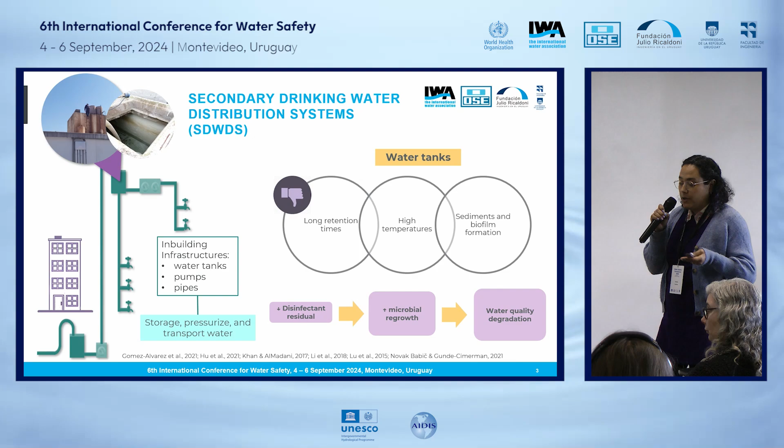Y todo esto hace que se produzca un crecimiento microbiano, un recrecimiento microbiano en estos sistemas. Y todo esto lleva a una degradación de la calidad del agua, principalmente una degradación microbiológica. Es ahí a donde nosotros queremos hacer foco y queríamos empezar a investigar en nuestro país para desarrollar mejores herramientas y nuevas herramientas de monitoreo y gestión de estos sistemas.

Nos hicimos preguntas como si el agua en estos sistemas, la calidad microbiológica, realmente sea afectada y luego de pasar por estos sistemas siga siendo apta para consumo. Y luego otras preguntas como qué microorganismos están en esos sistemas, en los biofilms, en los sedimentos, en el agua, cómo se intercambian entre las diferentes fases. Y por último, si estos sistemas podrían ser reservorio de patógenos oportunistas, como nuevos indicadores de alguna forma.

Para abordar esto, nos planteamos trabajar con sistemas, básicamente tanques elevados de cemento de diferentes edificios: hospitalarios, residenciales y universitarios. Los muestreos los hacíamos, ya que necesitamos acceder al tanque para tomar las muestras de las paredes y del sedimento, inmediatamente antes de las limpiezas. En Uruguay se recomienda limpiar anualmente los tanques en general, y los hospitales cada 6 meses. Entonces, antes de la limpieza, entramos a tomar muestras de agua, biofilm y sedimento.

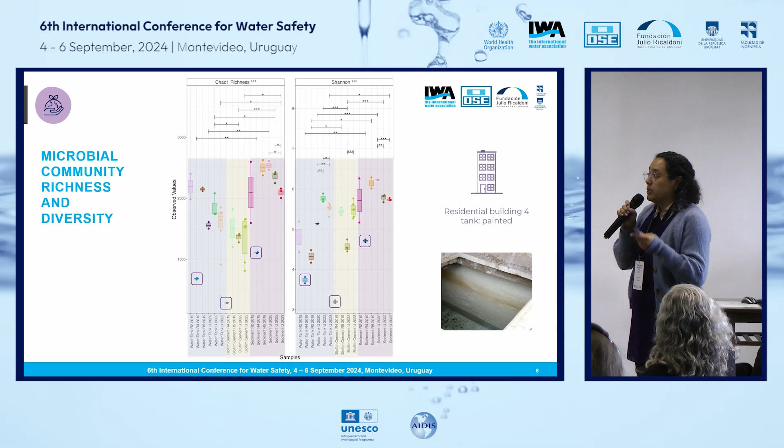Y cuando fuimos a mirar estos gráficos, también vimos que había unas muestras que tenían una riqueza y una diversidad bastante menor que el resto, y nos dimos cuenta de que era el edificio residencial 4. Ese edificio estaba pintado, mientras que nosotros trabajamos en general con tanques de cemento no pintados. Este en específico estaba pintado, y por eso tiene una riqueza y diversidad microbiana menor que el resto en todas sus muestras: agua, biofilm y sedimento.

Agregándole los hospitales, que se limpian cada 6 meses, vimos que en biofilm y en sedimento también teníamos riquezas y diversidades menores que en la media del resto de las muestras de los edificios residenciales y universitarios.

Perdón, pero está trancado.

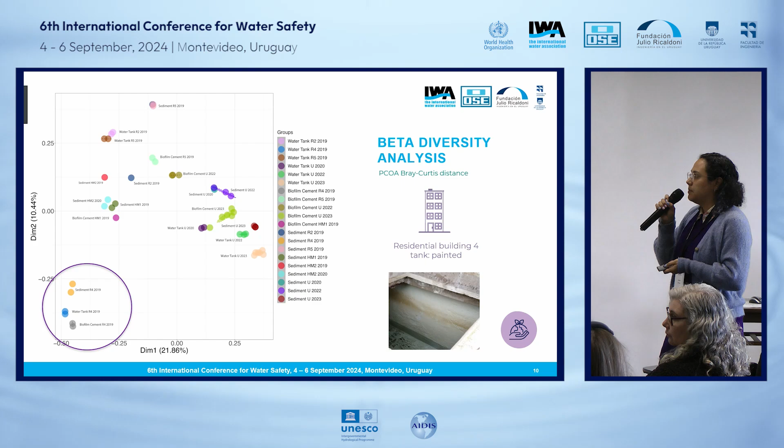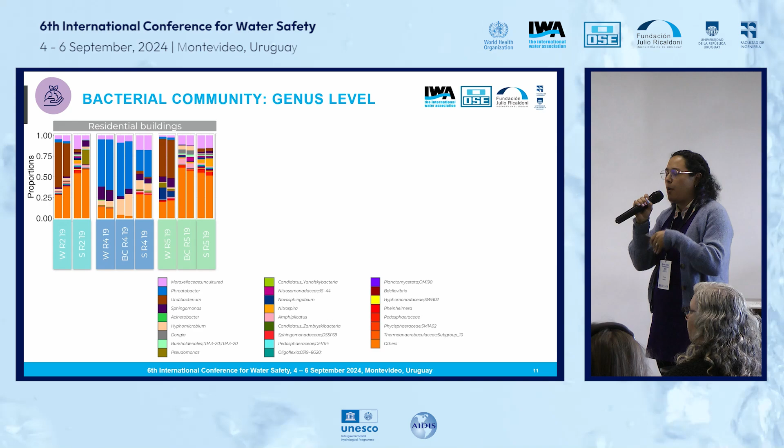Cuando vamos a ver los perfiles de los microorganismos, es decir, los más representados y abundantes en estas comunidades, generamos estos gráficos de barras que nos indican qué microorganismos son los más abundantes, en este caso los 25 más abundantes, y en qué proporción.

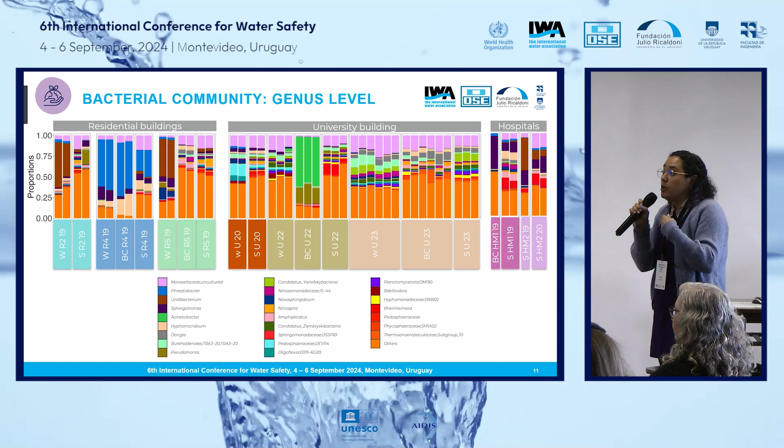Cuando vamos a mirar esto, vemos que son los mismos microorganismos para todos los tipos de edificios los más abundantes, pero la proporción cambia.

Y lo que vemos además... perdón, pero esto se mueve.

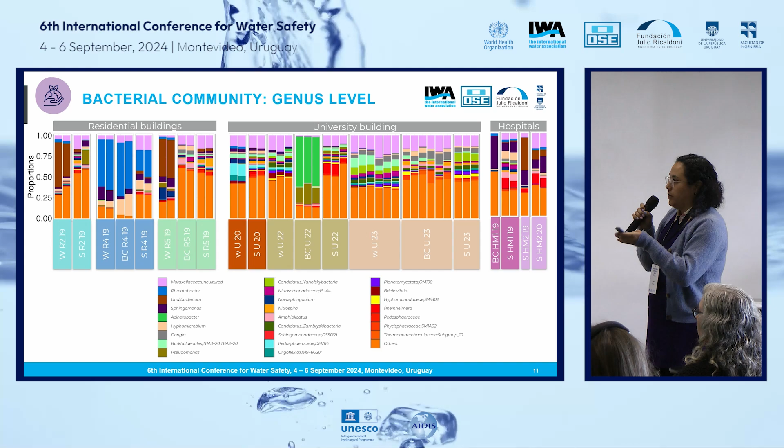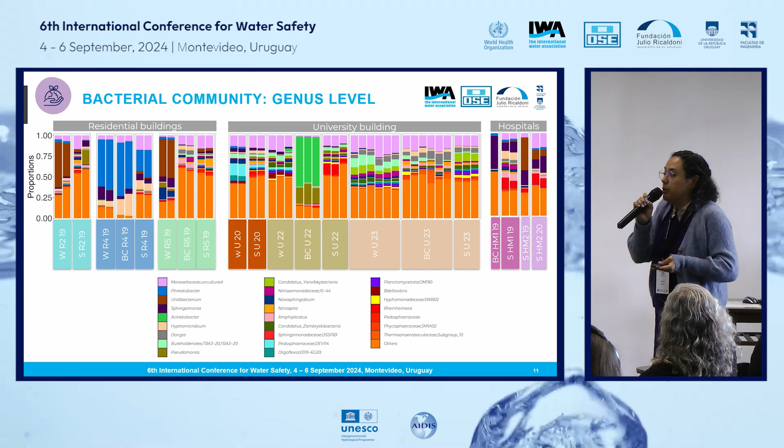Lo que vemos además es que los microbiomas, en este caso las comunidades bacterianas, son muy similares entre agua, biofilm y sedimento, pero van a depender del tanque, van a ser tanque dependiente, no son iguales en todos los tanques. Si bien tienen los mismos microorganismos, el perfil de esa comunidad es un poco diferente.

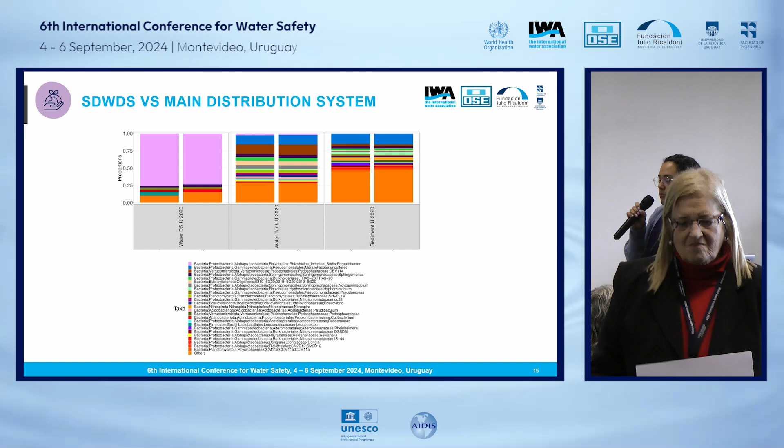Como final nos hicimos una pregunta: ya miramos un poco lo que son las comunidades bacterianas y fúngicas, y en todos los tanques más o menos el agua, el biofilm y el sedimento, la comunidad bacteriana es muy similar. ¿Qué pasa cuando la comparo con el agua de red?

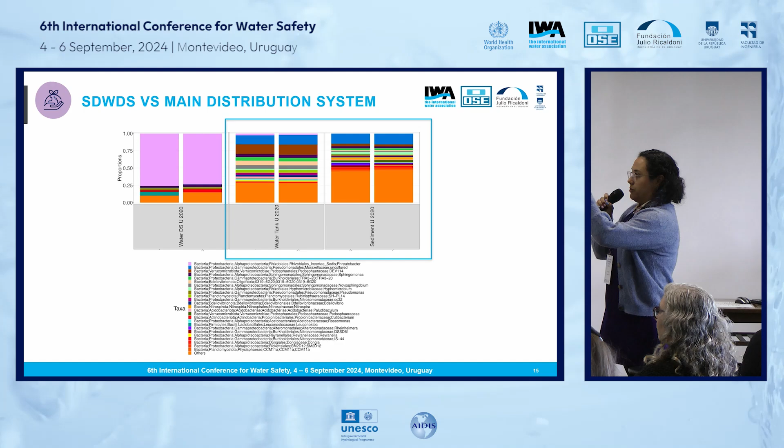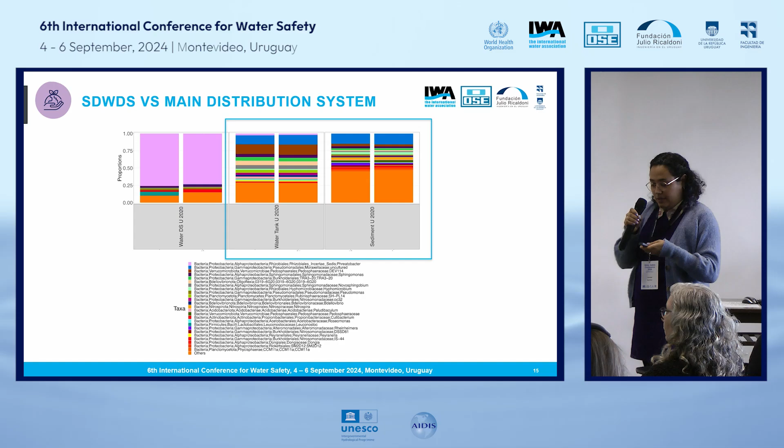A la izquierda, lo más rosadito es el agua de red, y lo que recuadré es agua en el medio, agua de tanque, y más hacia la punta el sedimento de ese mismo tanque. Vemos que la comunidad bacteriana del agua de tanque se parece mucho más al sedimento, un poco más sucio si queremos decirlo así vulgarmente, que al agua de entrada. Por lo tanto, estos sistemas están afectando realmente la microbiología del agua.

Como conclusiones, en cuanto a turbidez y pH, dos de los parámetros físico-químicos que medimos, solo el 20% no cumplió al final en el agua de los tanques analizados. En cuanto al cloro libre, confirmamos que está muy por debajo en los tanques, es decir que el desinfectante residual que se utiliza para controlar los microorganismos deja de estar, y por lo tanto no se puede controlar de esa forma.

En cuanto a la microbiología por cultivo de rutina, determinamos que más del 90% de los casos el agua antes de la limpieza no estaba apta para consumo. Eso nos despierta una pregunta: ¿cuándo deja de estar apta para consumo?

En cuanto al microbioma, vimos que las comunidades bacterianas del agua, biofilm y sedimentos son igual de ricas, muy similares entre sí. El agua tiende a parecerse a su biofilm y al sedimento del tanque, pero son menos diversas. En cuanto a las comunidades fúngicas, no teníamos resultados significativos que fueran diferentes.

En cuanto al tanque pintado, realmente la comunidad de ese tanque era diferente, y además, algo que no dije: en ese tanque no obtuvimos incumplimientos en el agua al momento de la limpieza, al año. El tanque podría ser reservorio de patógenos oportunistas, degradando la calidad del agua.

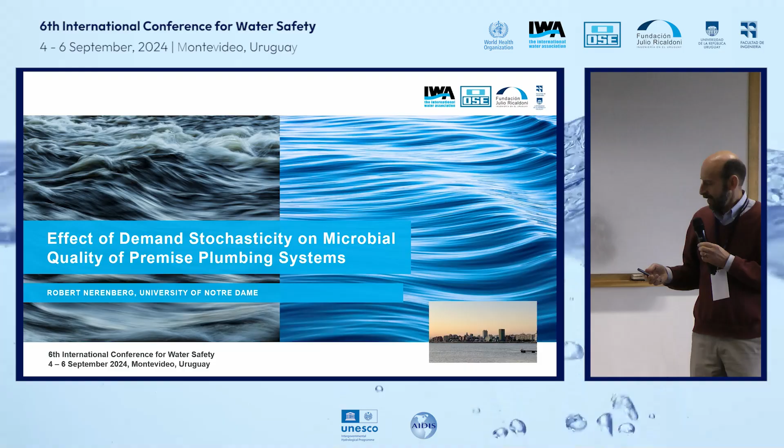Great. Well, thank you for the introduction. Before starting, I'd like to acknowledge the people that worked on this, especially Emily Clements, a doctoral student. What I'm presenting today covers 3 chapters of her dissertation, and also some colleagues who assisted on this research.

As we all know, we treat water at the treatment plant, and then we send it out into the distribution system, and the water quality can decline. It can decline because we have decay of the disinfectant, increase in temperatures which also affects the disinfectants, leaching of metals or other compounds from the pipes, and formation of biofilms. So all these things can degrade, and the more time the water resides in the pipes, the more likely the quality will decay.

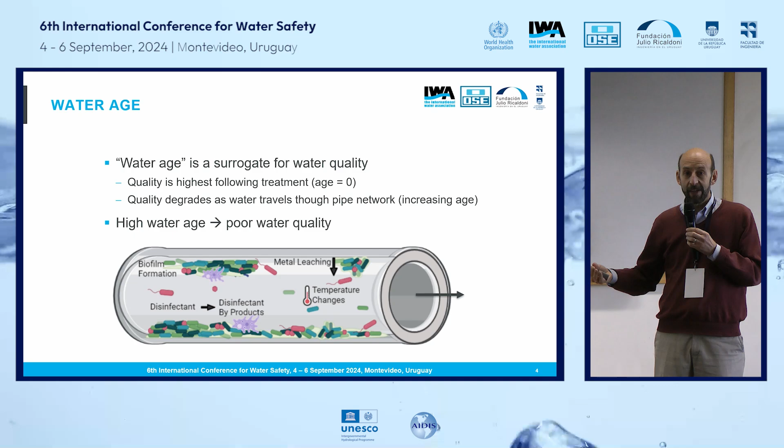So often we can use the water age as an indicator of the quality of the water, where if the age is very high, probably the quality is poor.

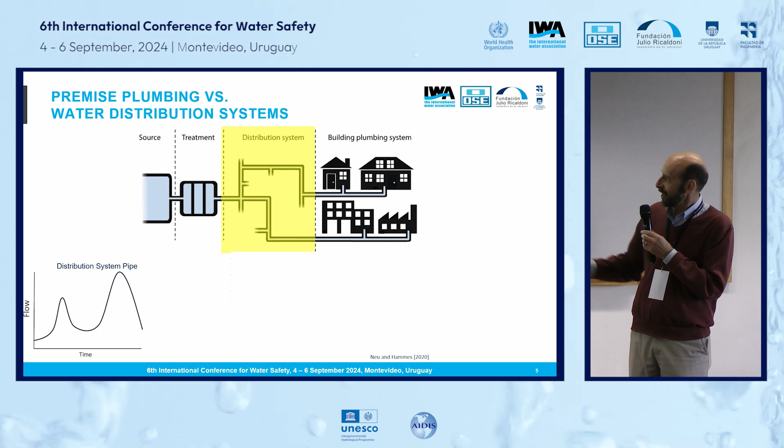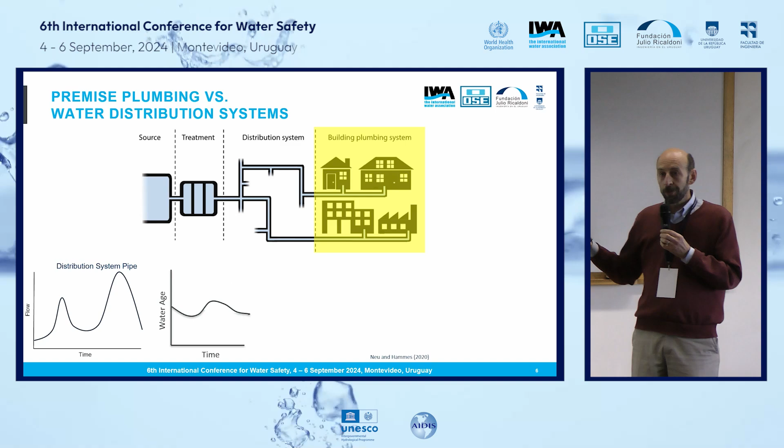As Soledad said, though, in the homes where the water is supplied, once the water enters the home, it's kind of your problem, it's your water, and if you don't use the water, it can be in the pipes for a very long time.

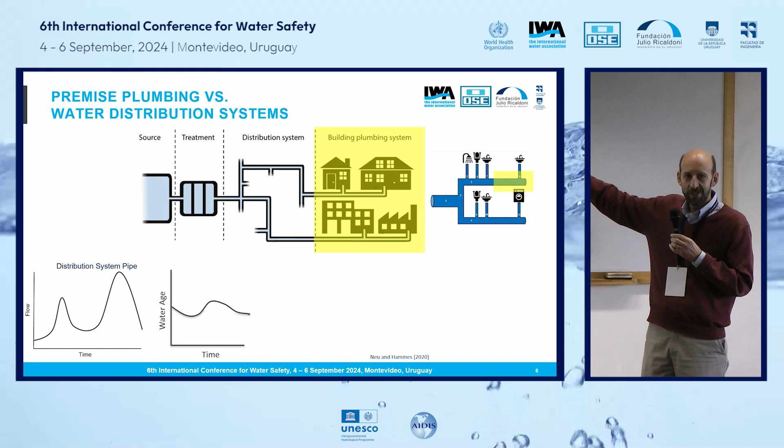So imagine here's the plumbing in your home, and in this pipe, if you don't turn on the tap at the sink, the water just stays there until you turn it on. This might look like the demand or flows of water over the day, where we have zero flow for long times. This is what the water age might look like in your pipe. So when it's not being used, the age increases until you open the tap, and then it comes down.

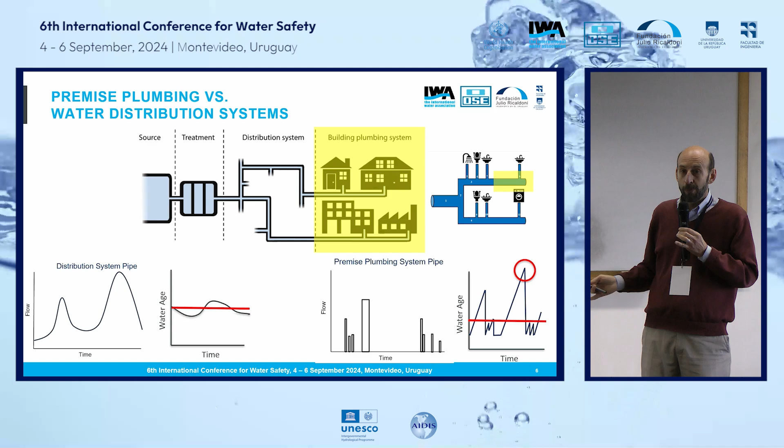So I would pose that in the drinking water distribution system with the big pipes serving many people, there's always some flow, so the water age might increase or decrease, but not that much. But in the home, it changes a lot. And if we look at the average for the distribution system, maybe it's okay. But if we look at the average for the premise plumbing system, maybe we're missing some important events that reflect poor quality.

So what we did in this study was try to characterize the effects of this variability in water demands. We did 3 studies, and I'll quickly go over each of these.

In one, we tried to characterize based on the stochastic water demands, because the water use is a stochastic process. Who knows? Maybe we take a shower one day and we go away for the weekend, and the shower doesn't get used for 2 or 3 days. It's a random process. So considering the stochastic water demands within a home, we wanted to characterize the extreme water ages.

In the second study, the effect of using automatic purging devices. So if we have a means to automatically use water on a periodic basis, maybe that can prevent long ages.

And finally, instead of directly looking at water age, we looked at the chlorine residual. Again, this is a modeling study, all 3 are actually modeling studies. But we looked at the chlorine instead of the age, because chlorine maybe is a better indicator for microbial quality.

So the purpose of this study was just to provide tools, because in the end, each home is different, each water demand is different, but maybe with tools we can see what are the impacts of having high-efficiency water devices that use little water. Is that going to impact the water ages a lot? Or maybe if we have 2 people instead of 4 people living in the home, how will that affect the age? Actually, all 3 studies were published in the last year.

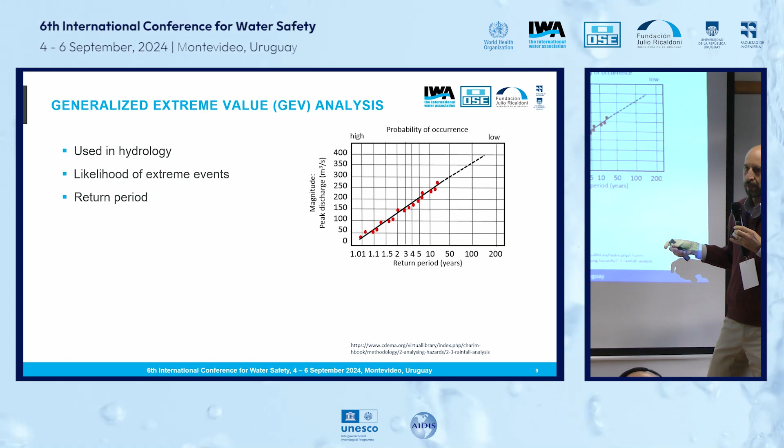So within 1 year, it's likely to have a small flood. But if we consider 100 years, what's the maximum amount of water that might come in 100 years? Well, every 100 years, we might get a really big flood. So you can see that for 100 years, there's a much higher flow. This is for hydrology. So we used a similar approach for the drinking water.

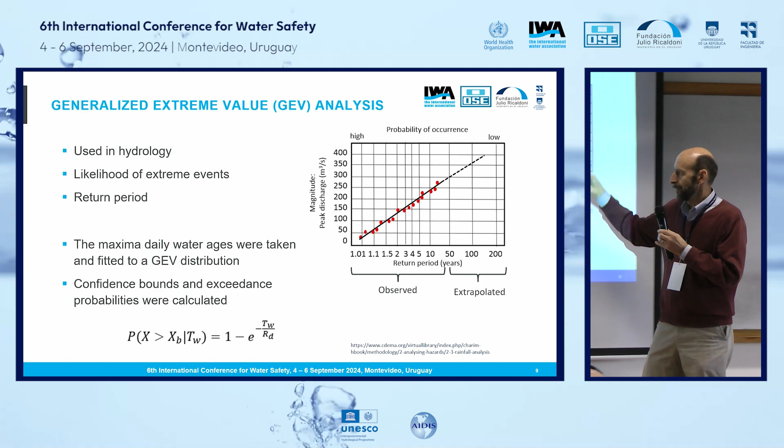Again, these are observed values, and then we extrapolate for 200 years because we don't have that much information. So basically, with this generalized extreme value analysis, we take the maximum values, we fit them to a distribution, and then we develop confidence bounds and exceedance probabilities. I'll show you in a second.

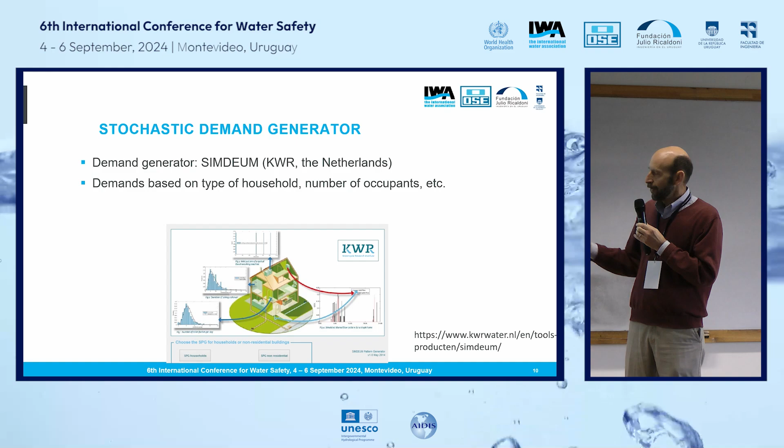In this study, we used a hydraulic model, EPANet, and we fed demands into that model based on a very nice tool developed by some researchers in the Netherlands. The research institute's called KWR, and the program's called SimDeum. It's basically a stochastic water demand generator.

So you tell it what kind of house it is, how many people there are, if they work at home or somewhere else, and it will give you a time series of water demands for the different fixtures, for the bathroom, the shower, the washing machine. And you can put that into your model. So it's a really nice tool. You can contact them and they'll share this with you if you're interested.

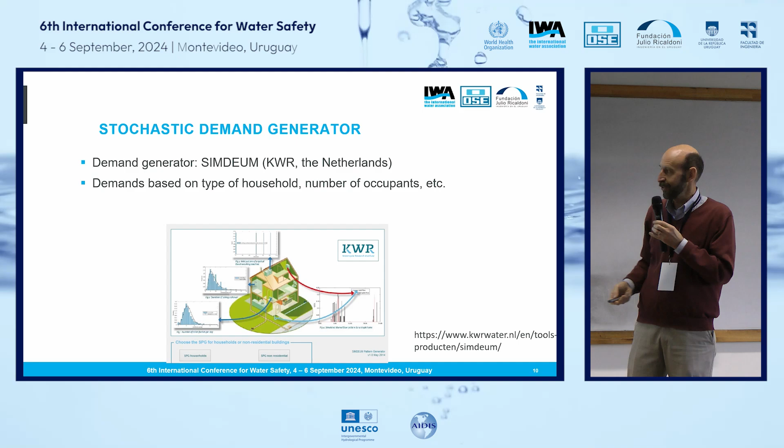So we took a single configuration of a home. Here's the distribution system, it feeds to the home. We have a bathroom, a kitchen, dishwasher, and so on, washing machine. And we assigned to these different fixtures a time series of water demands.

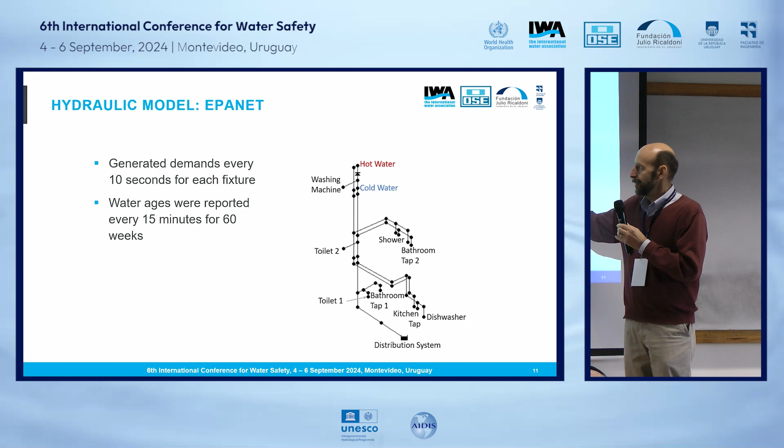And then used the model, EPANet, to calculate the water ages. So again, these demands are every 10 seconds, and we reported the water ages every 15 minutes for over a year.

We studied different conditions. We studied normal flow conditions, which is our baseline condition. For low flow, we put a multiplier, like 0.1, so all the demands came down. We didn't try to just pick one demand, we scaled all of them down. We also did the same for high flows, where we increased all the demands.

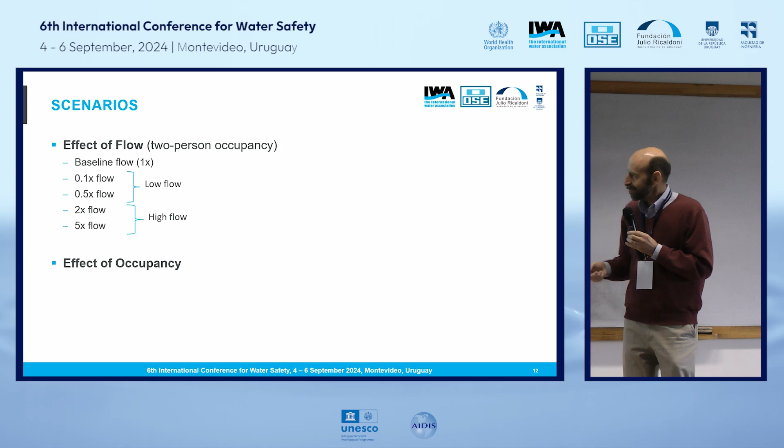And we looked at the effect on the water ages. We also looked at the effect of occupancy of one person versus two people.

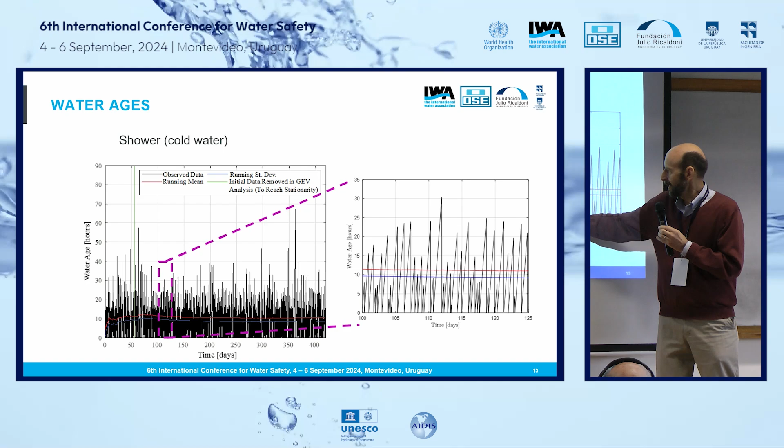So this is just an example of the output. You can see here these are the water ages over time. If it's not being used, the age increases. When it gets used, the age comes down.

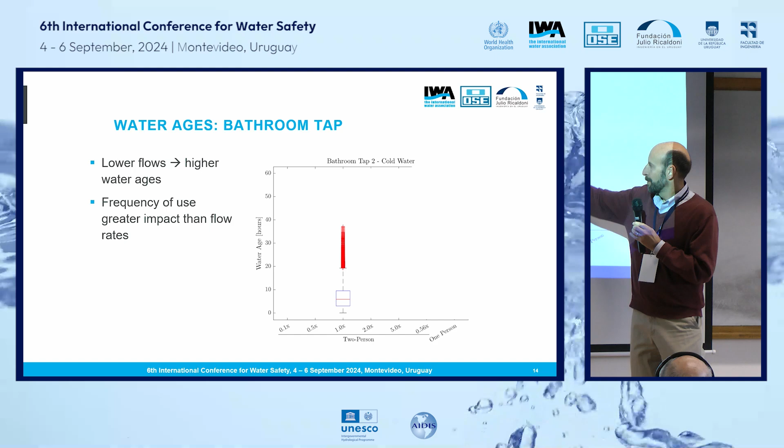As an example, for the bathroom, we have a box plot where you can see the average water ages, the 50%, the 75%, and the outliers, in hours. This is for the baseline, for just the regular demands. If we have lower demands, the water age increases, and we see even higher extreme water ages.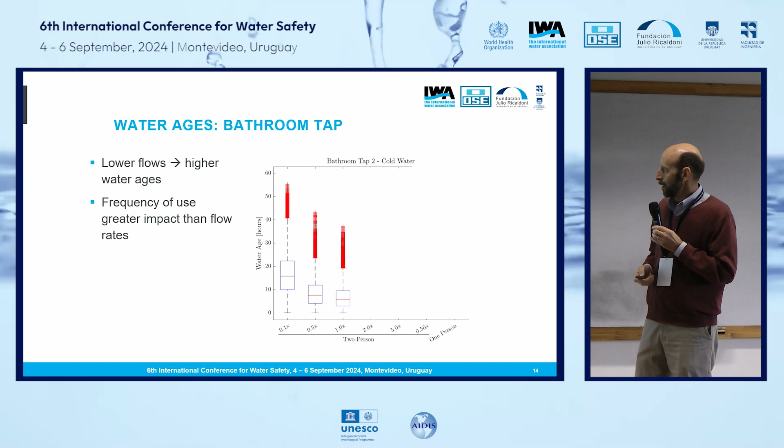So interesting fact: if you use water-efficient devices in your home, you might be creating water quality problems. For the higher demands though, there wasn't a big impact, because once you flush the system, using more water won't decrease the water age anymore.

It goes to zero. And then this is two people versus one person. You can see the one person increased the water age because the fixtures are used less frequently.

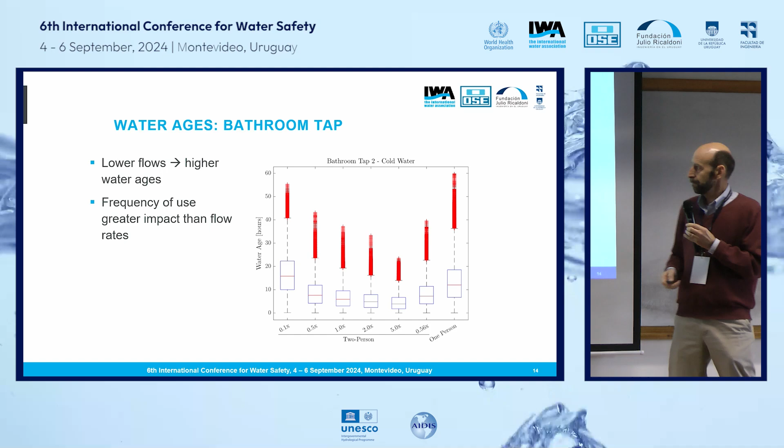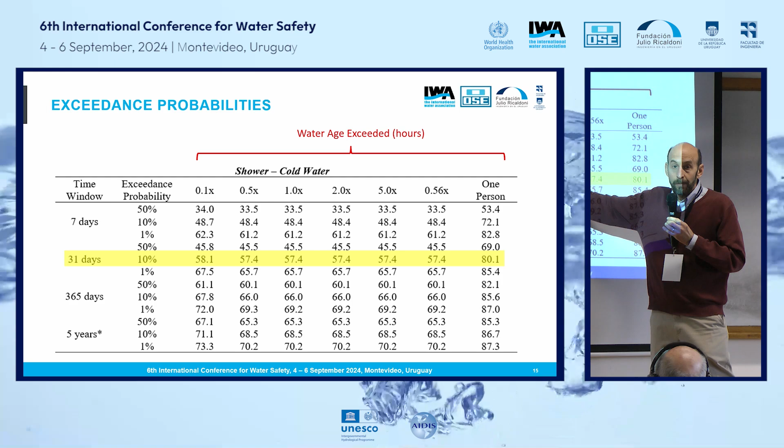This is just a table of the exceedance probabilities. As an example, over a course of 31 days, with a 10% probability of occurrence, for the shower there's a water age of 57 hours, so there's a 10% probability we'll have more than 57 hours. For the one person case, it was 80 hours. So again, it's a tool we can use to see these impacts.

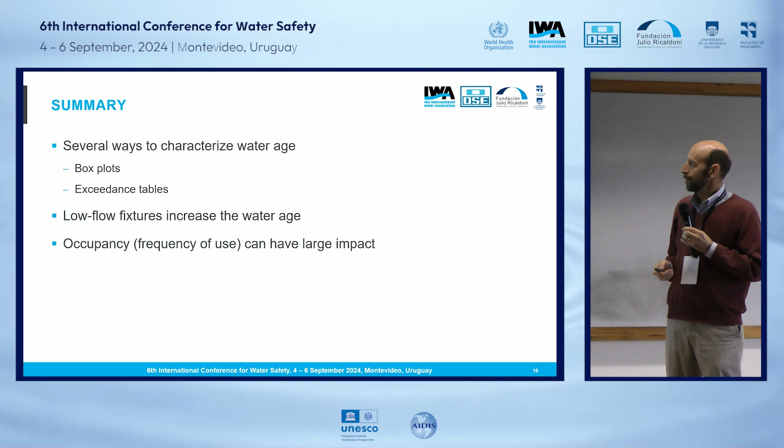The second study was looking at the impact of purging devices. Purging devices turn on the fixture every 12 hours or 24 hours. I won't talk about this much because it's kind of obvious that water ages will not be high.

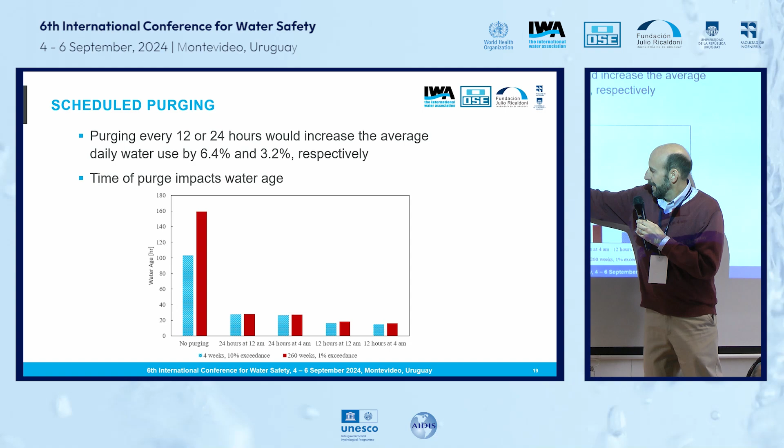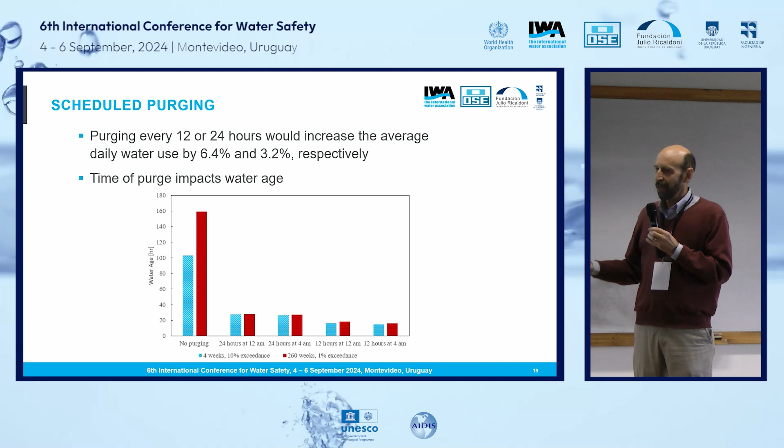If we implement these purging devices, with no purging we can have large water ages. With 24 hour purging, the ages will decrease a lot. The interesting fact, though, is it doesn't take that much water. So using these purging devices doesn't consume so much water. You're wasting some water, but not that much, and you can lower the age.

The third study was the same sort of thing, but looking at the chlorine residuals. Again, using the same model and the stochastic demands, we measured or predicted the chlorine increases when we use the fixture, and over time it dissipates. So we use several tools to study this.

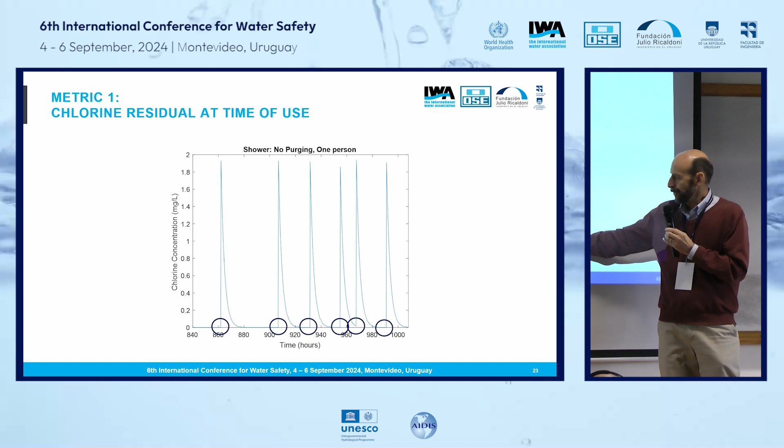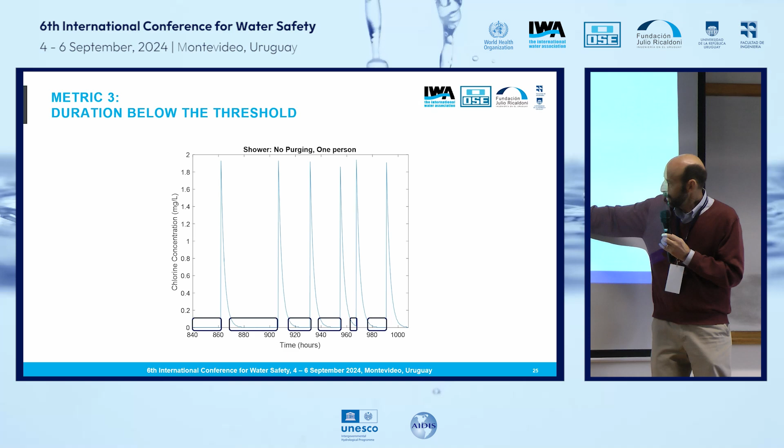If we add the purging, we don't have such low chlorine concentrations, and we can plot this in several ways. We can look at the chlorine concentration at the beginning of our use, or the fraction of time with low chlorine concentrations, or how long we have low chlorine. For the development of biofilms, maybe it's more important how long we have no chlorine than what percent of time without chlorine.

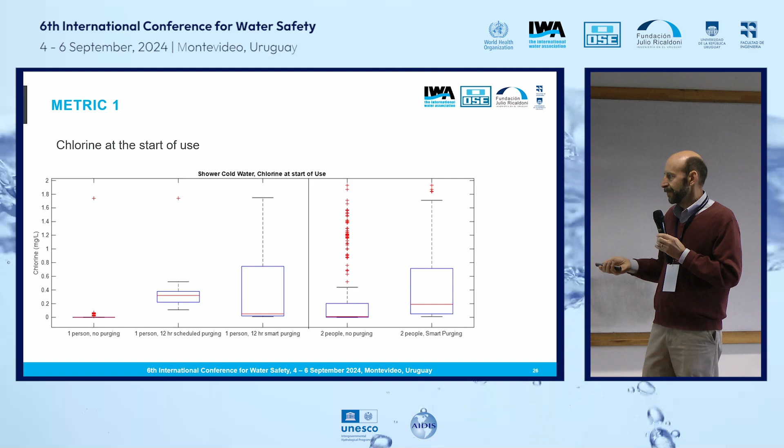I won't go over the details because I'm a little slow on time, but we were able to look at the different scenarios using this tool.

So in summary, for this chlorine study, purging helps maintain a higher chlorine residual. Higher occupancy, not surprisingly, also helps with a higher residual. Overall, this provides tools or a methodology to assess water ages considering stochastic demands. We can use it to look at different scenarios and see which ones are better or worse.

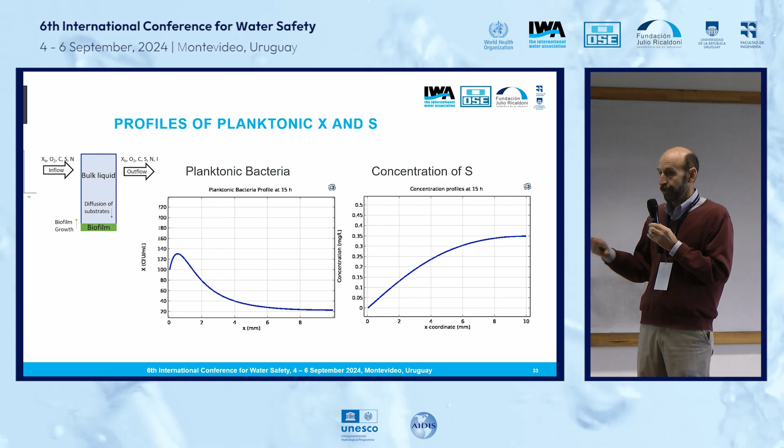And I just threw in some propaganda here. We also looked at models for actual biofilm and planktonic growth formation in pipes with the stochastic demands, and did some experiments looking at biofilm formation in shower hoses. But this may be for the next conference, where I'll hopefully be able to talk about it. So thank you for your attention.

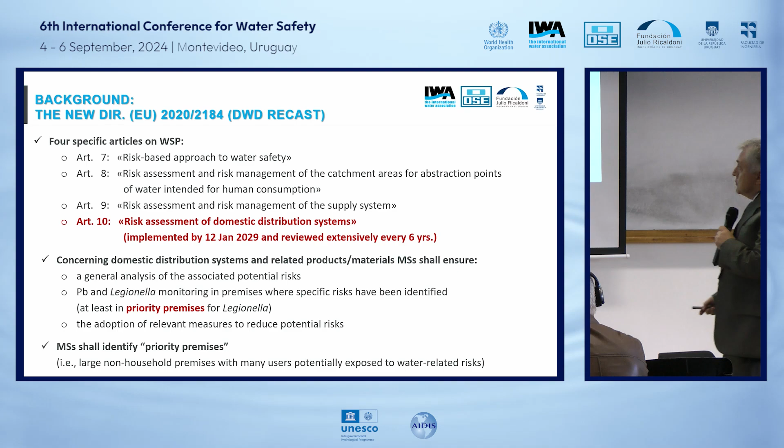About this application, we have some specific duties. The first is a general analysis of the associated potential risk. The second is looking for lead and Legionella in the premises, particularly in priority premises, but not only them. Then the adoption of relevant measures to reduce potential microbial risks, and also the risk coming from lead mainly. Another duty for member states is to identify the priority premises.

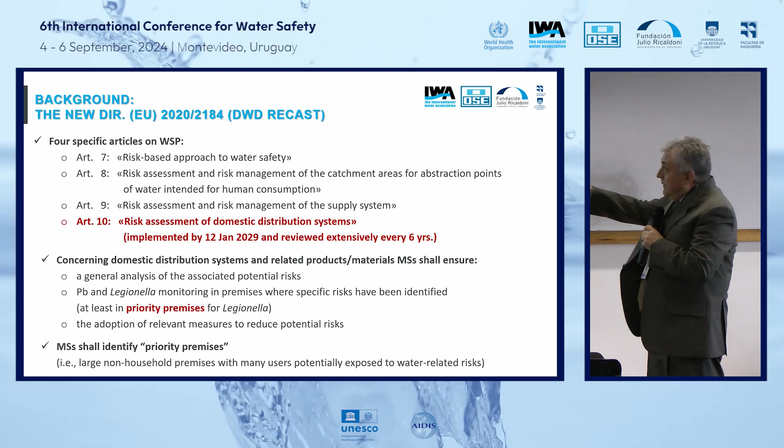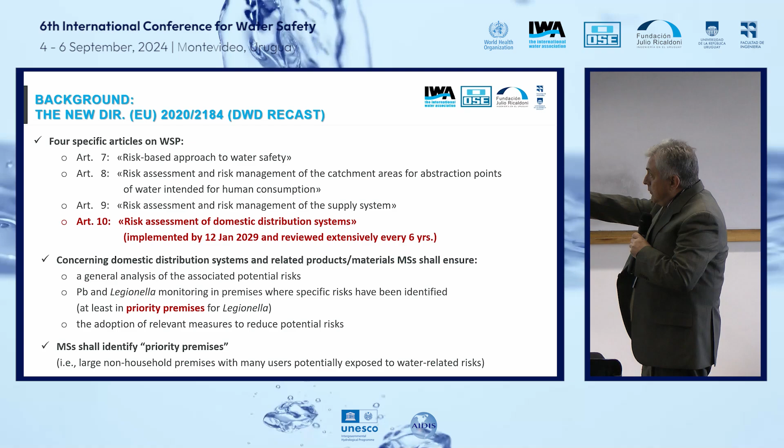So every country in Europe has defined the meaning of priority premises, taking into account that priority premises are large non-household premises, where many people could potentially be exposed to this risk.

In Italy, we have carried out a roadmap about water safety plan implementation. We started in 2009, and now we are continuing along this process.

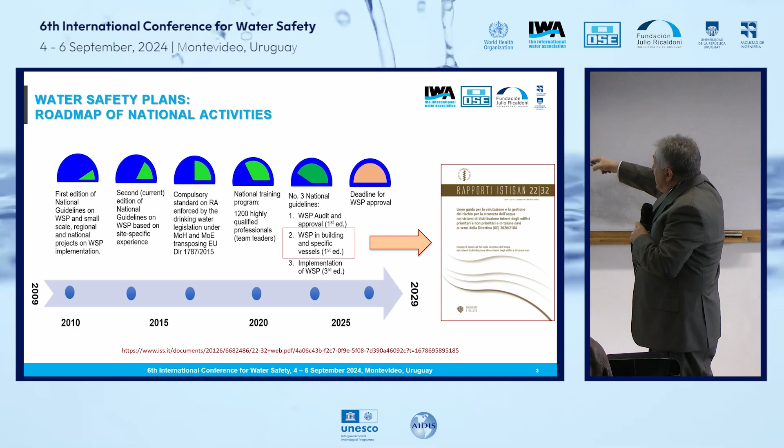About 2022, we published an Italian guideline about the application of the water safety plan inside buildings. This guideline was made by a working group, a permanent group of experts, and then was submitted to the attention of other experts just to validate it.

The guideline has some aims: mainly to identify the priority premises according to the Drinking Water Directive duty, and to support the water manager of indoor distribution water systems.

In Italy, we call this person the GIDI, an acronym for this definition. This person could be the owner of the building, the administrator, or any person responsible for the internal distribution water system. And then to support the development of training documents for staff and consumer education.

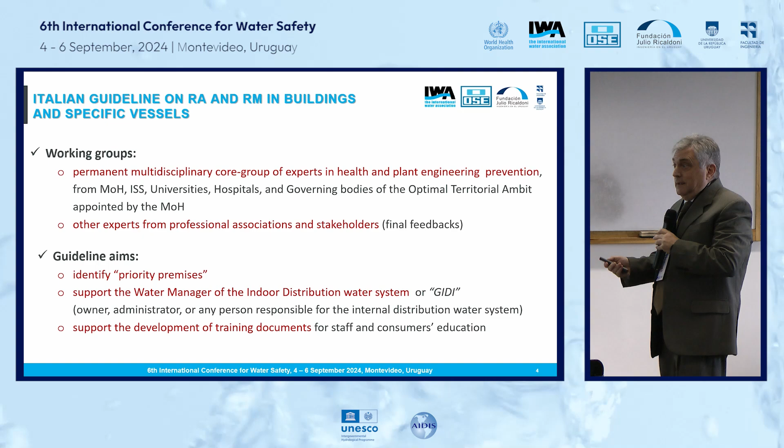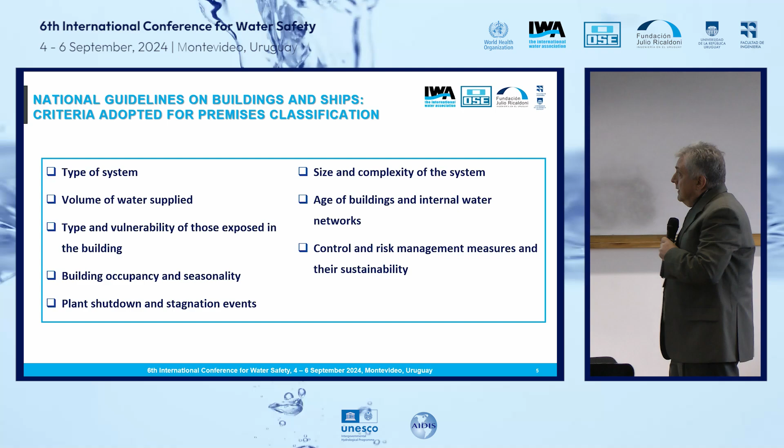First of all, we started with the identification of the priority premises, taking into account the type of system, the volume of water supplied, the type and vulnerability of the occupants, also the seasonality of the buildings, the occupancy inside the buildings, plant shutdown and stagnation events that can affect the risk, the size and complexity of the system, the age of the building, and the control and risk management measures currently implemented.

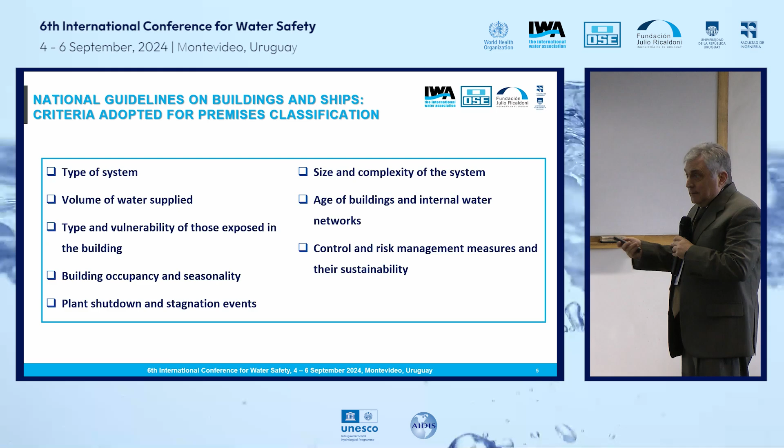And we propose this classification, which is valid only in Italy. Every country in Europe can adopt a different system. In Italy, we have subdivided into these classes. In red, you can see just the priority buildings according to the Drinking Water Directive definition. In class E are all the other premises. We have included this kind of premise just to give some piece of advice to the occupants.

At the top, we have health, social, and social-medical facilities, pensions - that means hospitals and other kinds of buildings where people can stay for a few days or more. Then we have other medical facilities like rehabilitation centers and dental centers and so on. Then we have hotel accommodation, penal institutions, passenger ships with desalination, stations, airports.

Then we have public and collective catering, including company and school canteens. And then the last priority building category according to our classification relates to educational establishments with sport facilities, gyms, sport wellness centers, barracks, penal institutions, campsites, community facilities. The last category includes all other buildings, mainly private buildings, but also offices.

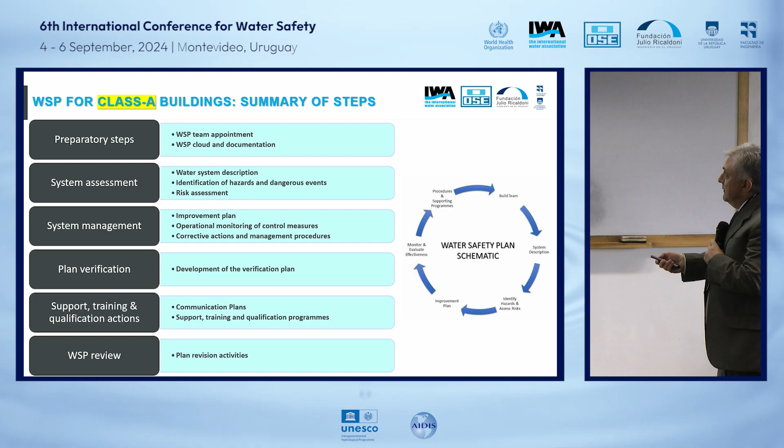Starting from the first class, that means the application of the water safety plan, we have the general principle of application of the water safety plan. In particular,

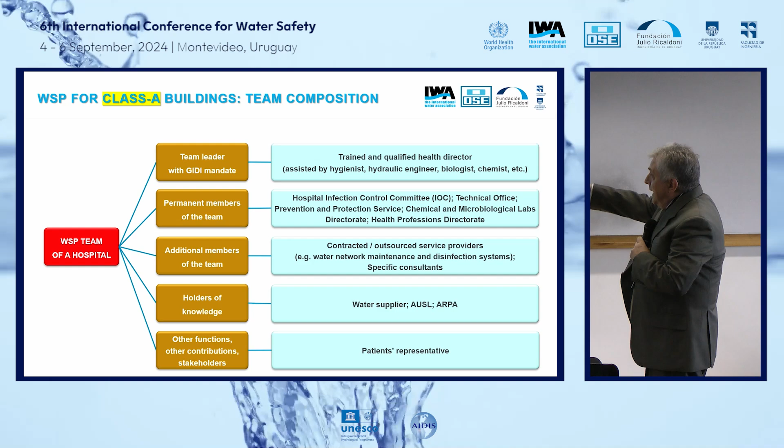About the choice of the team, we need a team leader with the GIDI mandate, that means the water manager responsible for the internal distribution system. We have permanent members, additional members, holders of knowledge, and other people like representatives from the patients.

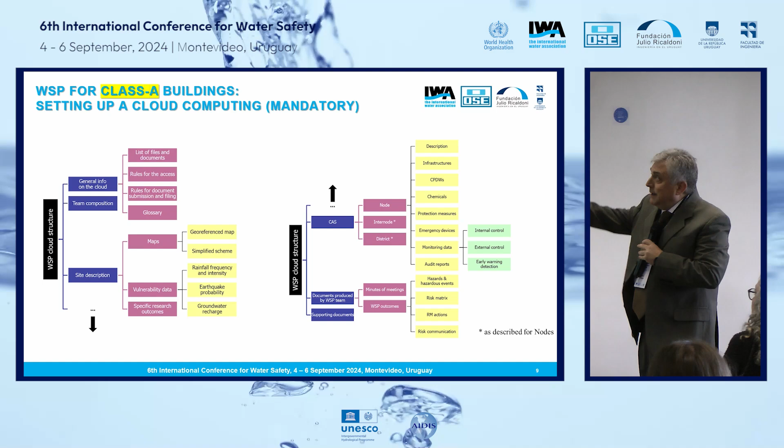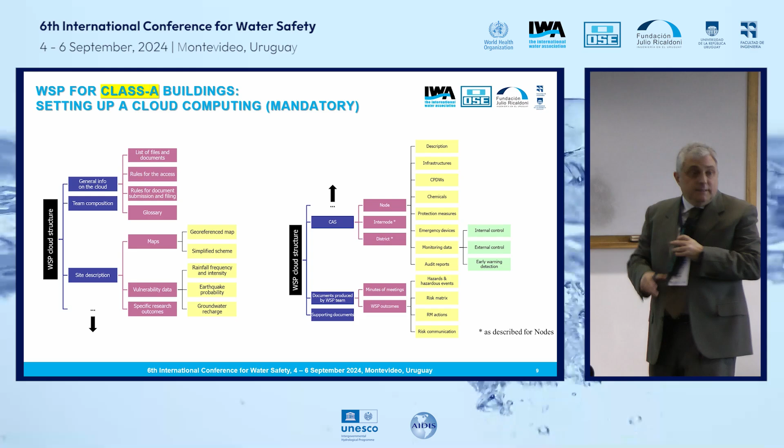In Italy, we have also asked for preparing a cloud. A cloud is a sort of repository where you can put every document, every map, one site where you can find every kind of information necessary for the implementation of the water safety plan.

Then we have the self-control plans and manuals that are required for Class B and Class C buildings. In this case, it's required the description of the water system, the identification of hazards and hazardous events, control and monitoring measures, and the verification plan.

It's a sort of light version of the water safety plan, not a complete implementation of the water safety plan. This is due to the expertise of people that are not present in these specific buildings, so we can't ask for the application of a complete water safety plan.

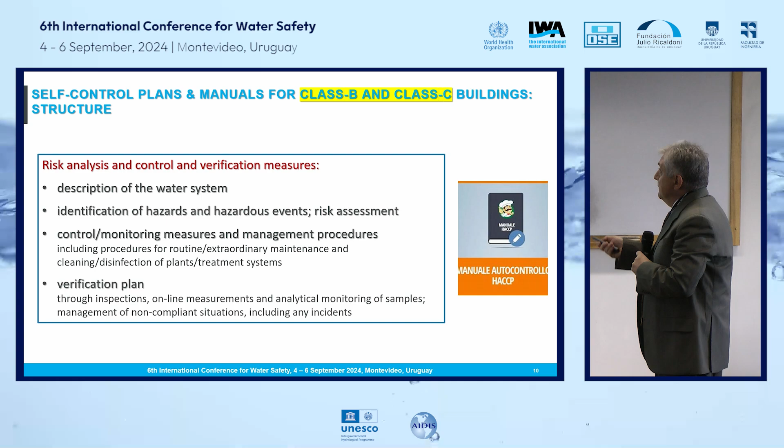People who are involved are the GIDI, a qualified expert, active involvement of the staff, the technical and scientific support from consultants, also the use of control laboratories for sampling and analysis, and the food business operators in case of catering facilities.

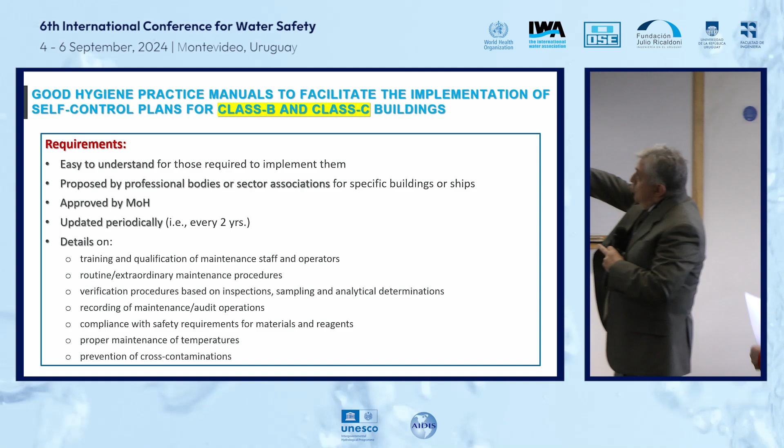About the good hygiene practice manual that can be used, the requirement is a manual that can be easily applied and understood by people who are involved in this process.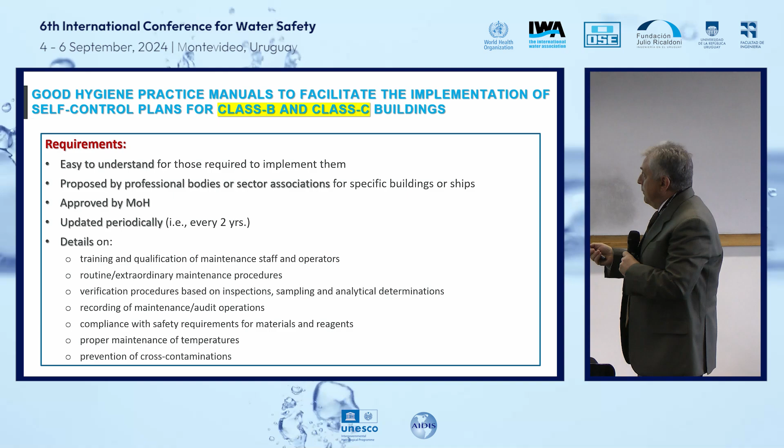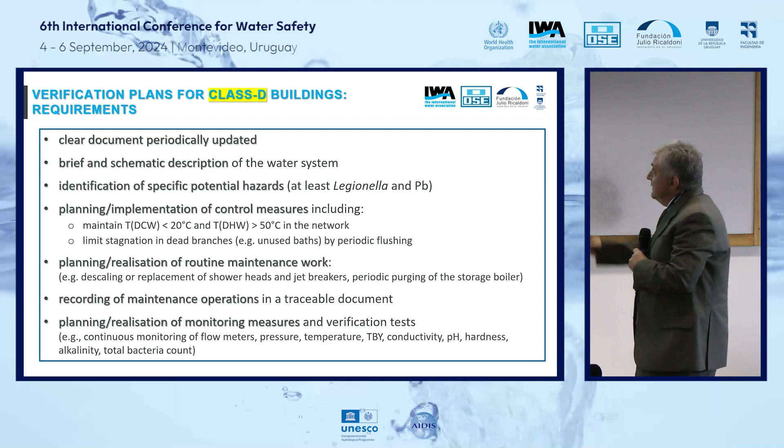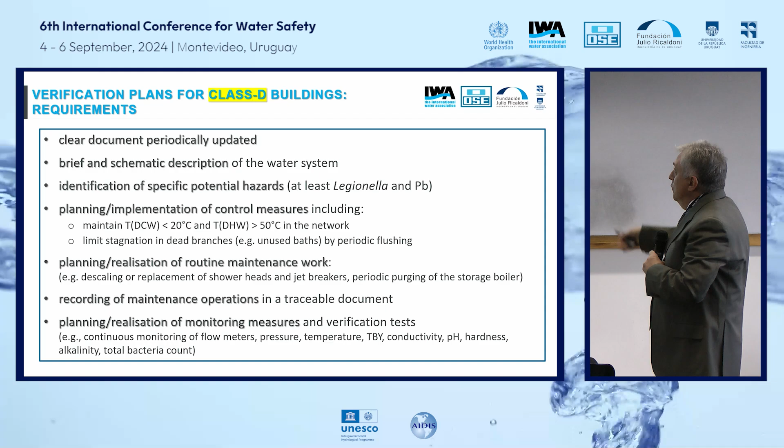And about the last of the premises required for the implementation of this system, the Class D, it's required a verification plan with some specific requirements you can see in this slide, which are lighter than the previous systems. So going from Class A to Class D, we are lightening the duty that the owner has to apply.

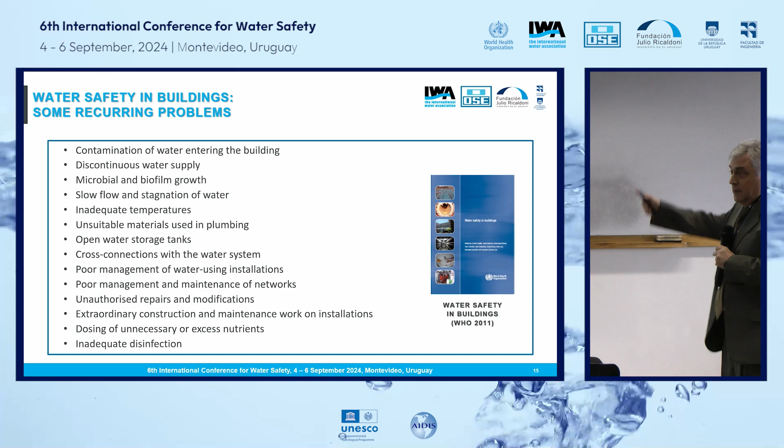And about the recurring problems, most of them were described in the water safety in buildings document published by the WHO in 2011. Just a few slides to recall the problems related to Legionella.

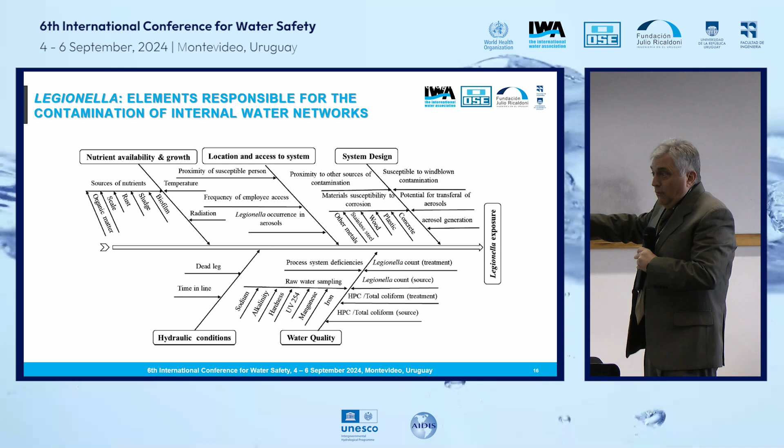You have to perform a specific analysis taking into account every effect on the growth of Legionella inside the buildings.

Another aspect recently ruled by the European Commission is about the release of some elements, so migration in internal networks due to the contact between materials used in the system and the water.

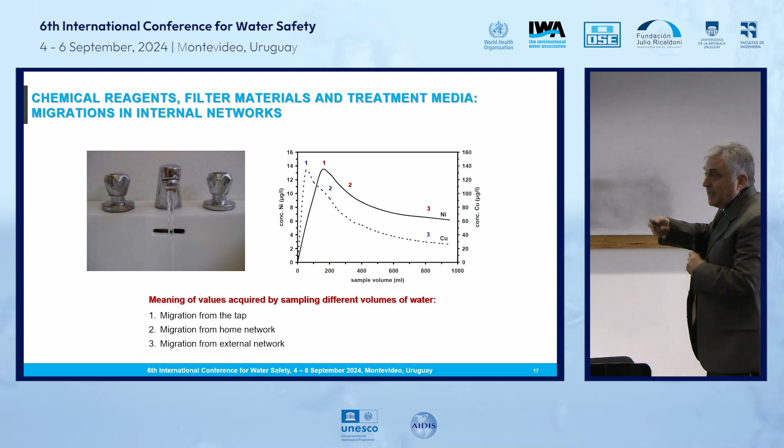You have this kind of profile for every kind of element and chemical species that can be released in the water flow.

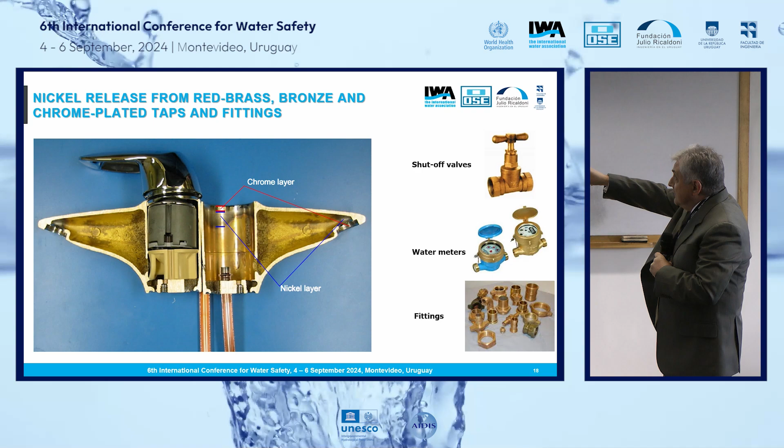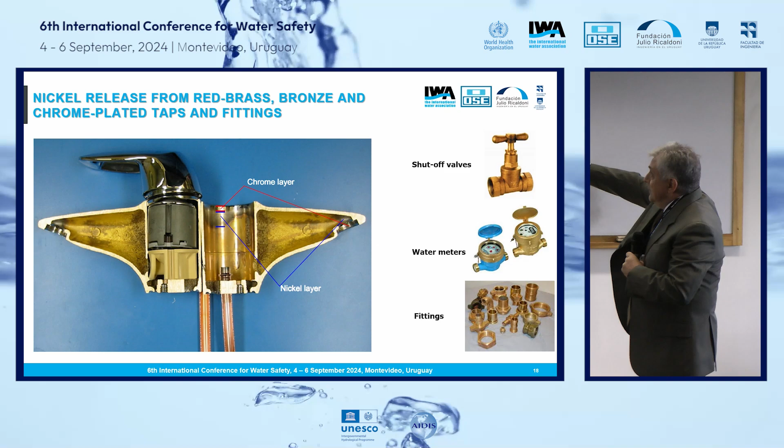It's especially important to take into account the nickel release that mainly comes from the tap, chrome-plated taps, because we have some residues present inside the brass of the tap, but also from other devices like fittings, water meters, and shut-off valves.

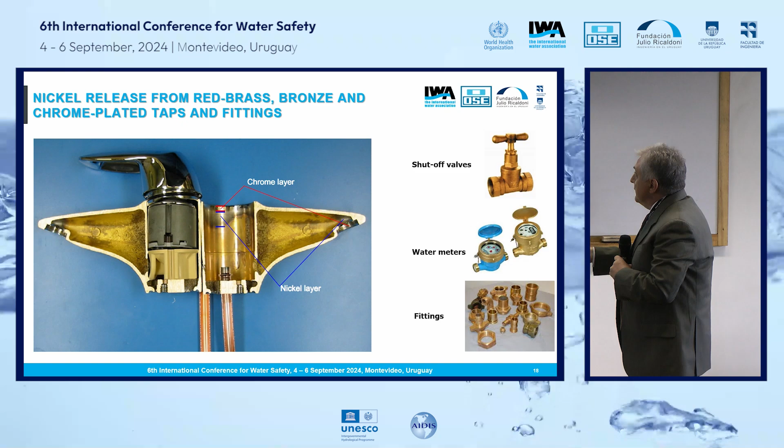Finally, another aspect is related to the release of lead, not only from lead pipes and seals made of lead, but also from dezincification-resistant, sorry, from the brass. It's a sort of metal alloy that contains lead inside the structure.

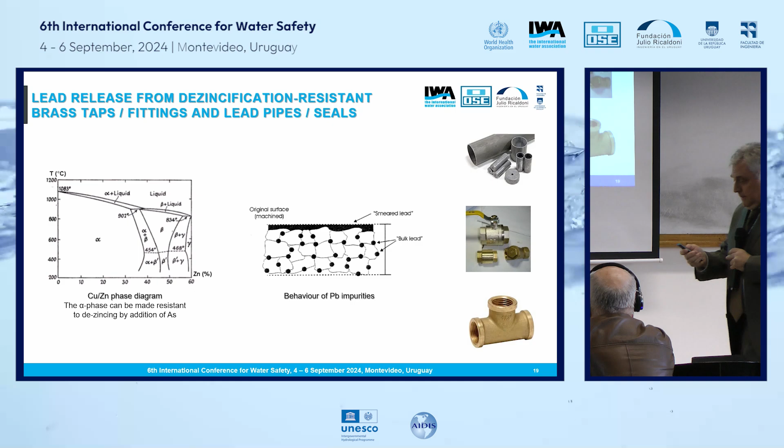When it is heated, the lead migrates from the internal body, from the bulk, to the surface level, and so it behaves like a lead pipe. Now it's ruled, it's not allowed in the drinking water legislation.

So I've just concluded. Thank you.

Thanks, Enrico. That is very interesting. It looks like you've actually thought about this, taken a step back, developed a framework, and you're now trying to implement it. You have given the owners of all these premises until 2029. These are not easy things to do. That is excellent, there's a lot of learnings, certainly for me. Very interesting information.